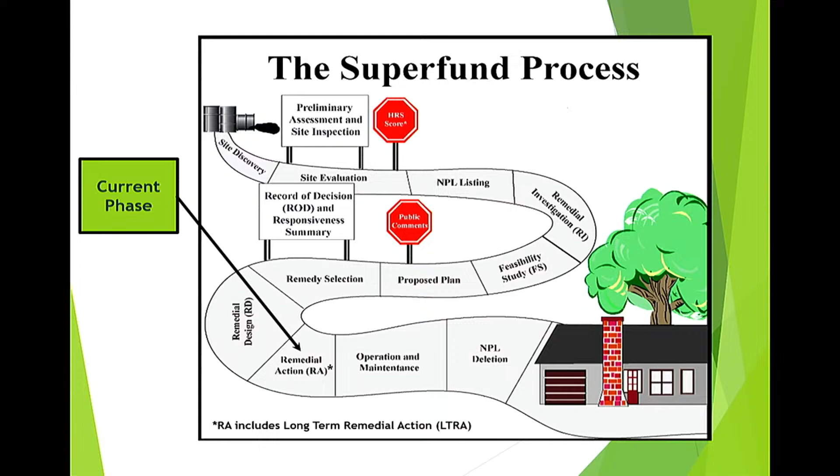So the site location, the Bandera Road Groundwater Plume Superfund site, is here in Leon Valley, in Bexar County.

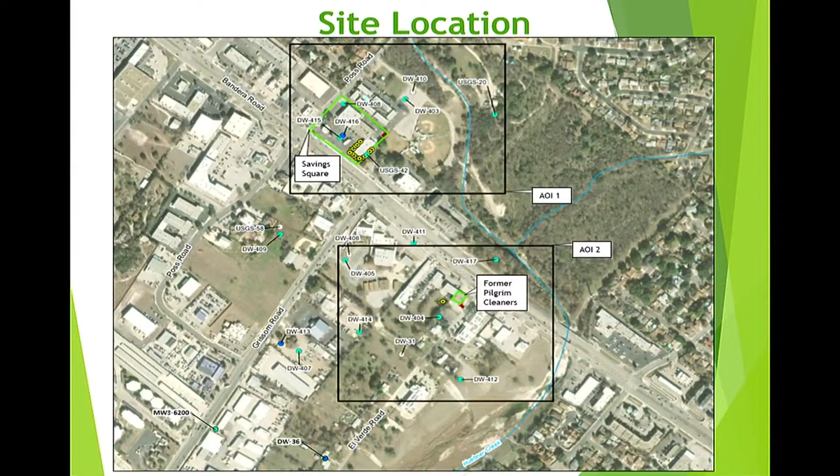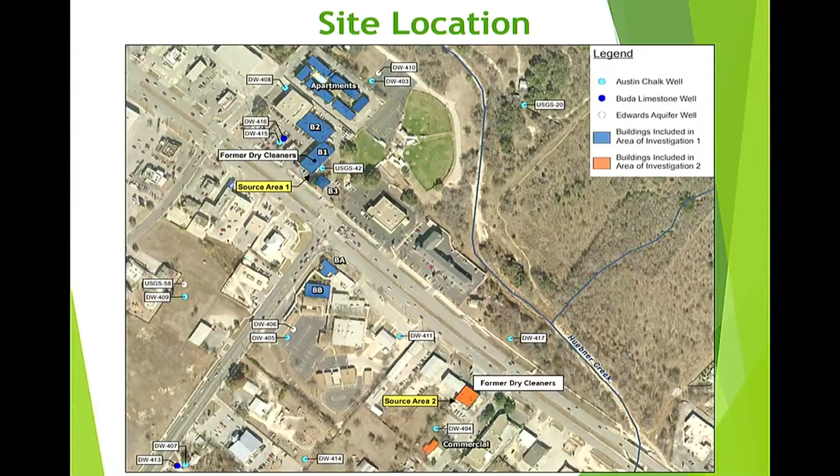The site has two source areas that were identified, AOI, which stands for Area of Investigation. We've got AOI 1 and AOI 2. During the remedial investigation, multiple AOIs were looked into, and these two were determined to be the source areas that needed to be treated. AOI 1 is what we call Savings Square, a shopping center off Bandera Road. AOI 2 is centered around the former dry cleaners, called Pilgrim Cleaners, just across the street from City Hall. Other well locations shown are groundwater monitoring wells that we sampled. This also shows more detail on different buildings that were investigated, some well locations, and the associated AOIs, AOI 1 and 2.

For site background, the site was first identified in 2004, part of the TCEQ voluntary cleanup program, later added to the National Priorities List by EPA in 2007. The CAG, or Community Advisory Group, was formed shortly after. That same year, immediate action was taken to connect some private residences to public water supply, to eliminate exposure to contaminated water. A health assessment was completed, and steps were taken including installing indoor air mitigation systems at one of the buildings at Savings Square, and plugging and abandoning private wells that had the potential to contaminate the underlying aquifer, the Edwards Aquifer.

In 2009, and then from 2011 to 2012, the remedial investigation and feasibility study, and a follow-on remedial investigation, were performed. As mentioned, the two source areas identified were both former dry cleaning facilities: AOI 1 at Savings Square, and AOI 2, the former Pilgrim Cleaners. The record of decision was finalized in 2013.

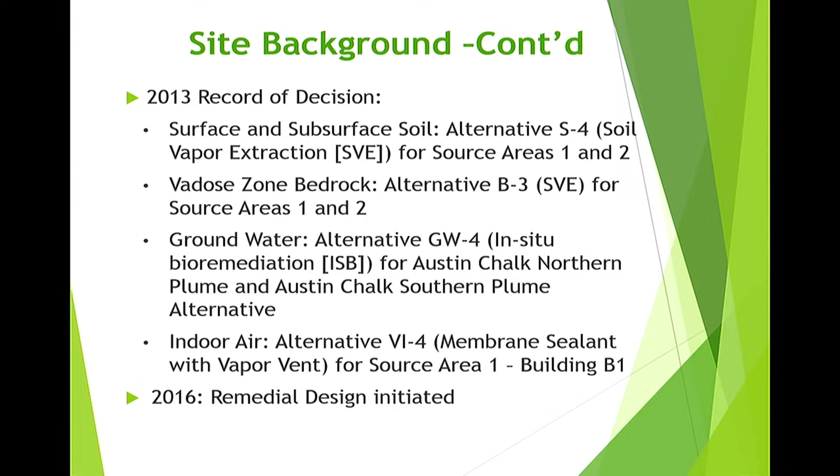That was the record of decision, and it rolled into the remedial design in 2016. As part of the design, more data was collected: 4 rounds of groundwater sampling, 5 rounds of indoor air sampling, and some soil gas sampling. They also abandoned 8 additional wells with the assistance of the Edwards Aquifer Authority, to continue reducing potential opportunities to contaminate groundwater further into the Edwards. In November 2020, the final design was completed.

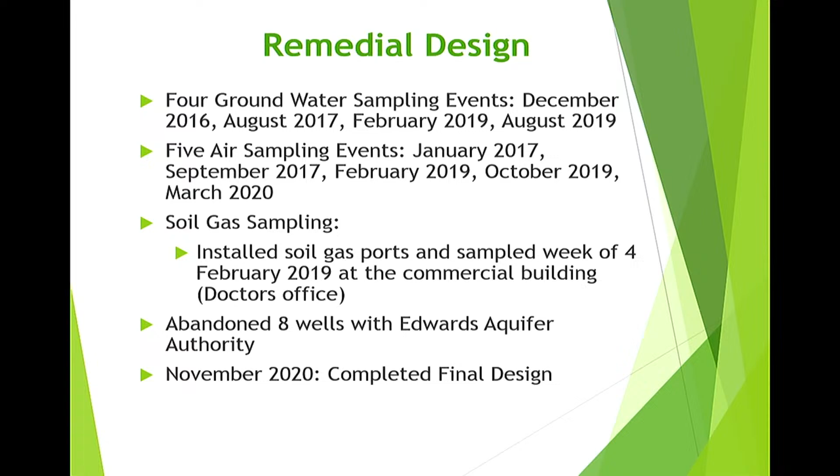So at this point, the remedial action, the remedy's been installed. For the soil vapor extraction system, both were installed and completed back in January 2024, and the systems began operating later that same month. One note: we've got 2 systems, one at AOI 1, one at AOI 2. The system at AOI 1, we've done some shutdown testing and determined that pulsed operation would be the best way to operate it, and that was started in October 2025. We'll get into that a little more later.

We're continuing to do O&M of the systems, coming out to check on them, address alarms, take readings, that kind of thing. We're also doing indoor air sampling, which we currently do on a semi-annual basis, typically February and September of each year. This shows our most recent events. We did collect samples back in February of this year, and we'll go over those results in a bit.

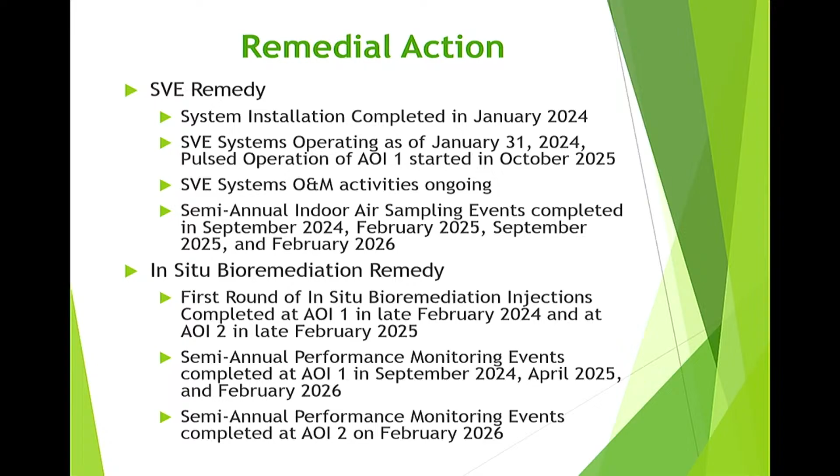For the groundwater remedy, we've done one round of injections at both sites. At AOI 1, those injections were done back in February of 2024, and at AOI 2, they were performed in February of the next year. Now, in the period after the injections, we're collecting groundwater samples from the immediate area where we injected the amendment to evaluate how the remedy is performing. We're doing those monitoring events on a semi-annual basis. At AOI 1, we've had three rounds of sampling, and at AOI 2, we just did our first round of sampling in February of this year. I'll let Taylor go over our more recent groundwater sampling results.

Do you have that clicker? Oh yeah, here you go. Just click that. All right.

This table here, I should probably differentiate. As Greg mentioned, we have our annual groundwater sampling, which is a site-wide effort, and then our ISB sampling, which is a targeted effort specifically for measuring our ISB performance. This table is for our annual groundwater sampling. The different wells we sample are in the column on the left. The far right column is our most recent sampling event. This was at a unique point in February where both the annual groundwater and the ISB performance monitoring sampling were all collected during one collective big event.

The results that are highlighted are those that exceed the EPA MCL for PCE, which is 5 micrograms per liter. If you look at DW404, the second one on that list, you'll notice that we have an exceedance for the first time since December 2016.

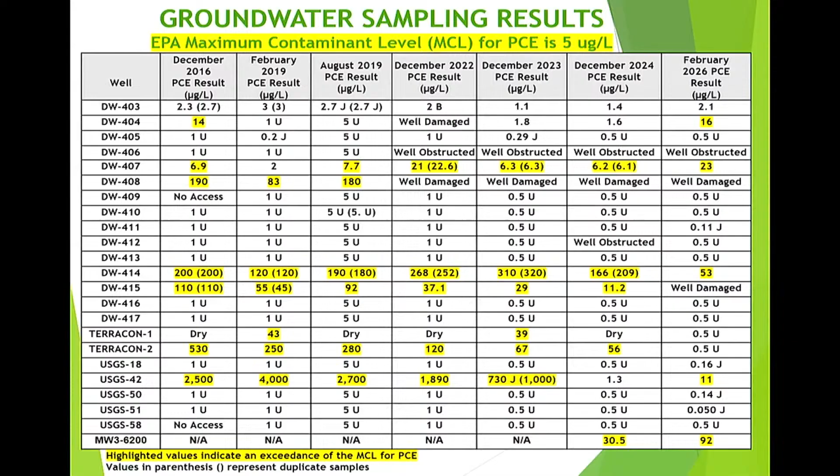Same with some of those other wells—415 now is in the same category. Parking lot damage, or what's going on with that? I could look at exactly what our notes said, but I think it's just some of the wells—we've had a rock that's kind of obstructed it, or a metal clip from our sampling tethers. And then there was one well, I think, where it had a bunch of old tether and diffusion bags stuck in there. So I think it's things that can be addressed so that we should be able to resume sampling. Those wells are still usable.

Yeah, I believe so. What's the history with that MW3 6200? That's an old well.

Early in the presentation when Greg was talking about AOI1 and AOI2, before the ROD, they were evaluating multiple different areas as multiple different AOIs. At one time, I believe there was upwards to 5, and eventually they were all ruled out to where AOI1 and AOI2 are considered to be the source areas that were targeted as part of our work.

We believe that MW3 6200 was part of the AOI3 investigation, so it's kind of in our area, and it was readily available for us to bring in rather than drilling a new well. Is that the old storage unit? Yeah, and it's an Austin well, right? Yeah, Austin Chalk.

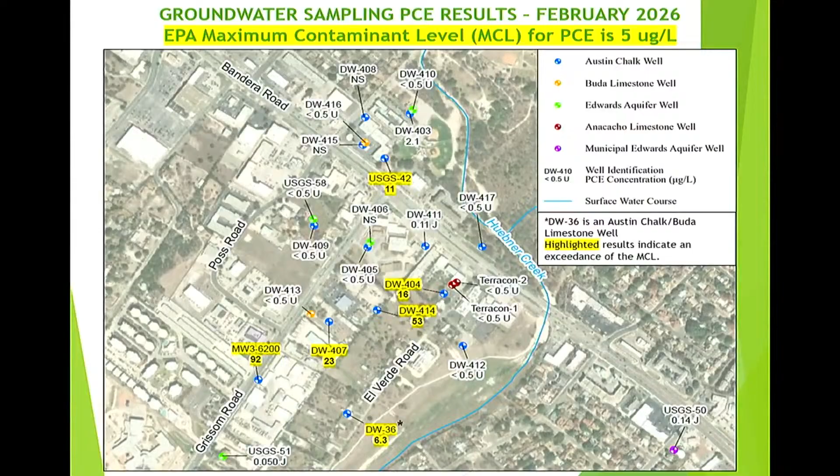Especially when you get to the Cis12 DCE and the vinyl chloride, that's what you would expect from the reductive dechlorination process, seeing those start to rise while PCE and TCE lower or reduce. And then at AOI2, we have Terracon 1 and 2 with VC exceedances and at 404.

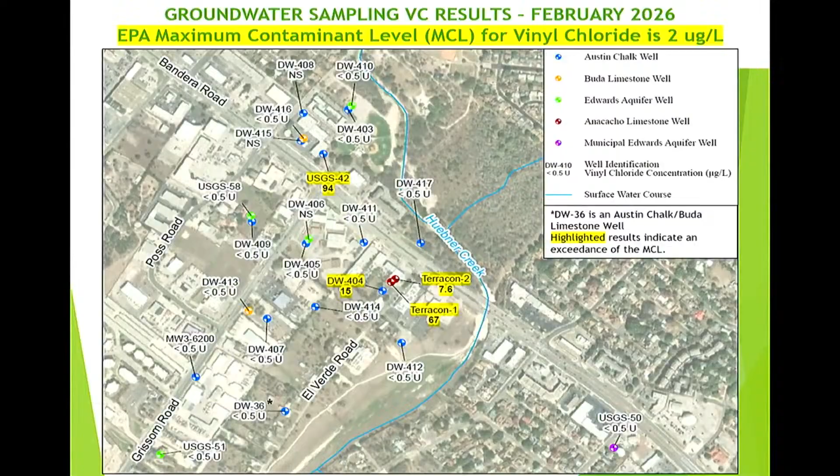Okay, so this shifts gears from our annual groundwater sampling, site-wide sampling, to our targeted ISB, our in situ bioremediation performance sampling. So this is a map of our AOI1. Those dots that you see going around the perimeter, like in a U shape, around that building there.

The red, both the red dots and the yellow dots, they're all injection wells. Whether they're used for injection or for sampling, that's when they'll be red versus yellow. So the red dots are injection wells that we use for directly injecting our amendment into, and the yellow wells are used for actually sampling to gauge the performance for those.

So USGS 42, that's the historically hot well. That's closer to the source release, in the bottom right corner. As you can see, that's come down quite a bit from baseline. Each of the results that we have on here, the top is their baseline result, and then with each consecutive ISB sampling event - first event, second event, third event - that's the data that you see in those call-out boxes.

Going around clockwise, IW06, as you can see, that's a good indication also, just like USGS 42, of reductive dechlorination working, starting at 45 and then most recently being dry, but coming down the two previous events.

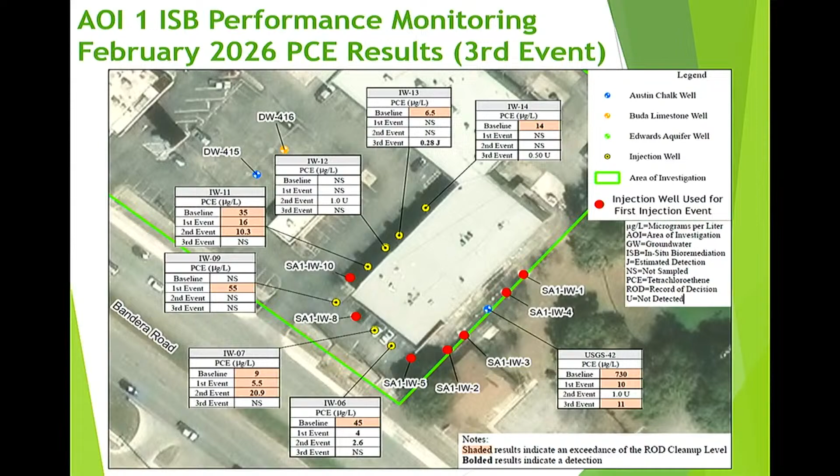Okay, so these are trend graphs for some select wells that we've looked at. Specifically USGS 42. You can see this would be something that you would expect for complete reductive dechlorination to be occurring, where PCE starts really high, PCE and the daughter products all come down, and then you start to see sort of a rebound of vinyl chloride and cis-1,2 DCE.

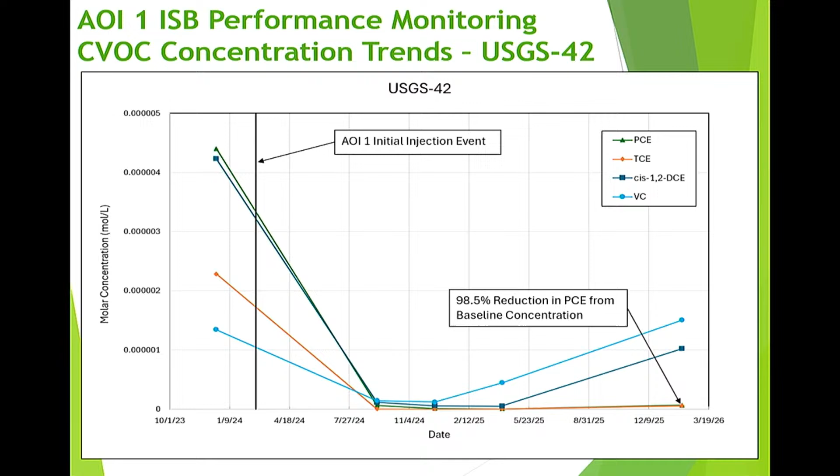IW11 was going down, both PCE and TCE being the highest. There's another general indication of reductive dechlorination doing okay, maybe with incomplete reductive dechlorination, with DCE and vinyl chloride trailing off.

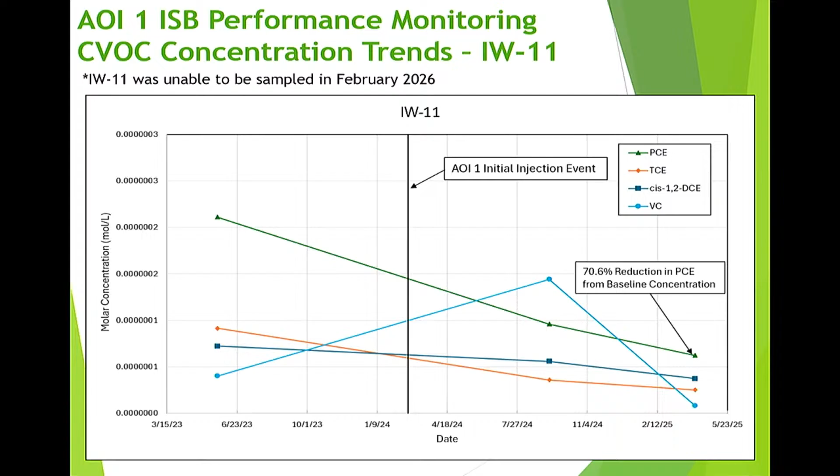Okay, so some of our general observations: we've had significant reduction in CVOCs from baseline, particularly at USGS 42 and IW6. Treatment areas that were established, that's likely due to those being areas where the available carbon in our amendment was able to be effectively distributed through the plume area.

The limited effectiveness that we see from our IW8 injection, that would be the well we inject right next to IW7, where we would hope to see favorable results. That would indicate there's limited effectiveness from what we're doing at IW8.

And as is typical for injection remedies, we've seen rebound following depletion of the organic carbon amendment. So the available carbon in our amendment, when we inject, can deplete over time, and it's no longer available for the biological process to keep going.

And as we said, several wells were unable to be sampled because they were dry, meaning they had insufficient water in them. That's another complication of having several wells in a small distributed area and showing the effects of a karst aquifer.

Our recommended next steps would be to collect another round of ISB performance sampling. John, like I was mentioning to you, then we'll probably determine from there whether we need to do another event or not.

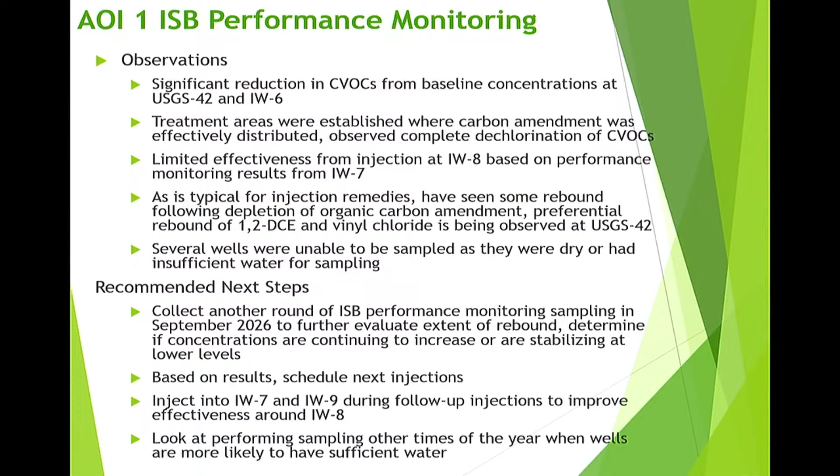All right, from the groundwater results, we can move into the indoor air sampling that we performed. So these are the indoor air sampling results, just for PCE.

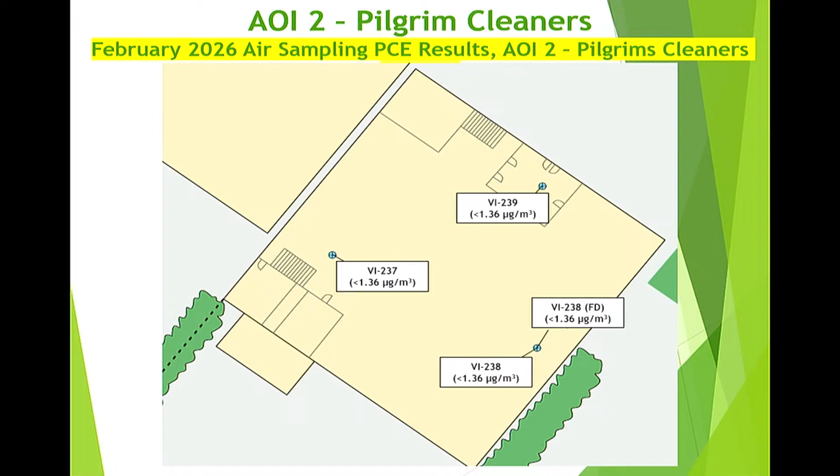Building 1 is at the Saving Square site, and building 3 is the vet clinic right next door. Mostly non-detect for PCE, but a couple low-level detections at Saving Square. We also sampled at the former Pilgrim Cleaners building, and had all non-detects for PCE there. There's a former doctor's office across the street, a little bit down El Verde from the former Pilgrim Cleaners building, but we sampled that one as well and had non-detects for PCE there.

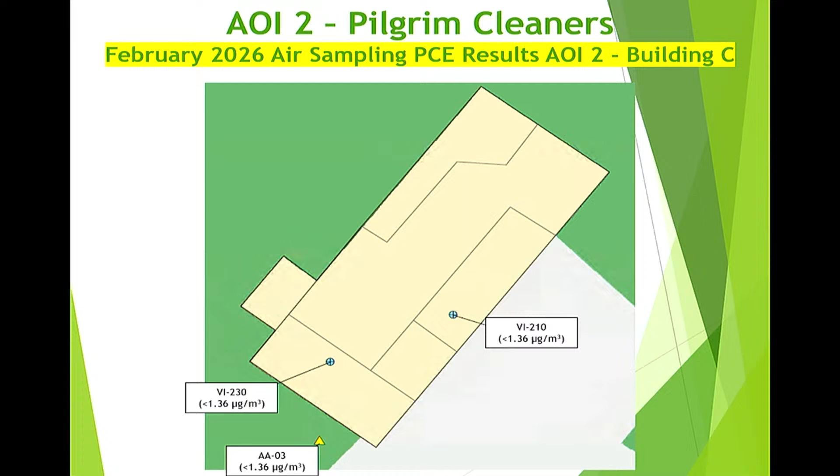While we had low-level or non-detects for PCE, we did have some hits for TCE at building 3. The most recent results show one sample location a little bit over the indoor air cleanup goal, which for TCE is 8.8. We had a detection of 11 there. The other two had detections, but below the cleanup goal. That's kind of consistent with the past event before that.

To address that TCE exceedance, there is an existing vapor intrusion mitigation system, basically a fan to help pull vapors from underneath the slab. But it's not currently in operation, so we want to get that back up and going, and hopefully make some progress on that.

That fan hasn't been operating for a while. It was two solar powered fans, and it looks like the solar panels are no longer working. So the fans need to be replaced, and what we propose to do is tie it into the electrical panel so the fans run continuously versus based on solar power availability.

When do you think that'll be finished or get that back going? I think there's some things that administratively have to get done so we can get out there and do that, but hopefully in the next couple months.

Greg, which of those buildings are occupied currently? Savings Square is occupied, building 3 is, and the former Pilgrim Cleaners is now the Royal Tile building. But as far as I know, and maybe David or someone at the city would know, the former doctor's office over there, I don't think that building is occupied.

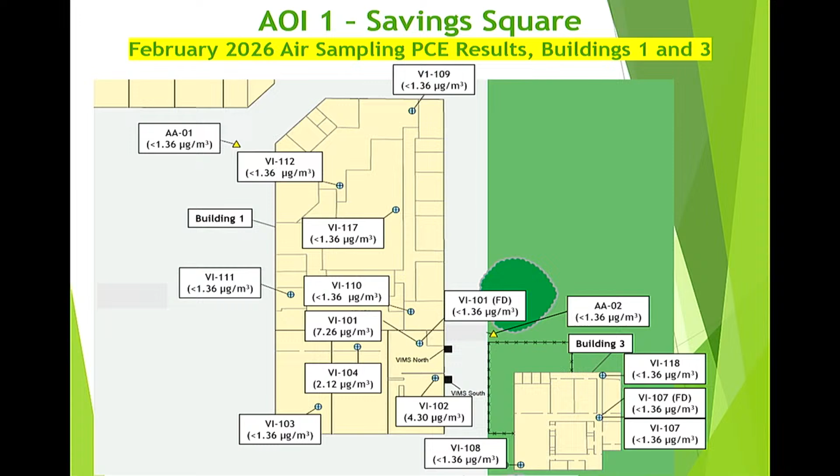Are those Summa canisters? How do you all do that? Yeah, we collect Summa canisters, and since it's like an industrial or commercial exposure, we try to collect those samples over an 8-hour period -- they kind of reflect the workday.

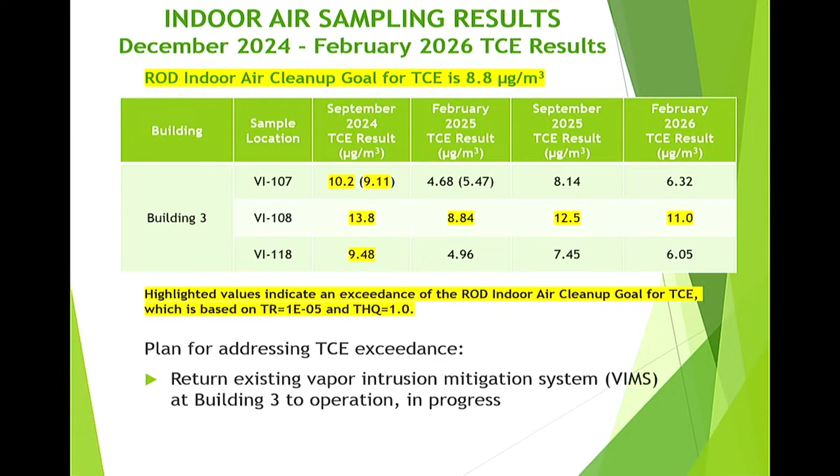Now we can get into the two SVE systems. This is the system over at AOI 1, showing the system layout. Both systems are built inside shipping containers or Connex boxes. At the AOI 1 site, that system's located in the rear parking lot. Exterior to the container, we've got some other equipment.

We've got a condensate storage tank, the GAC vessels, which are used to treat the discharged air before it's emitted to the atmosphere, and some other electrical components. It also shows the subsurface piping that goes from the system out to the individual SVE wells.

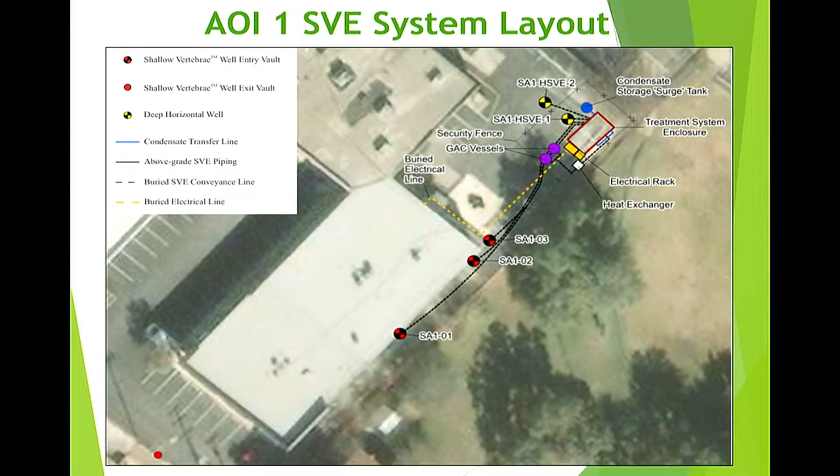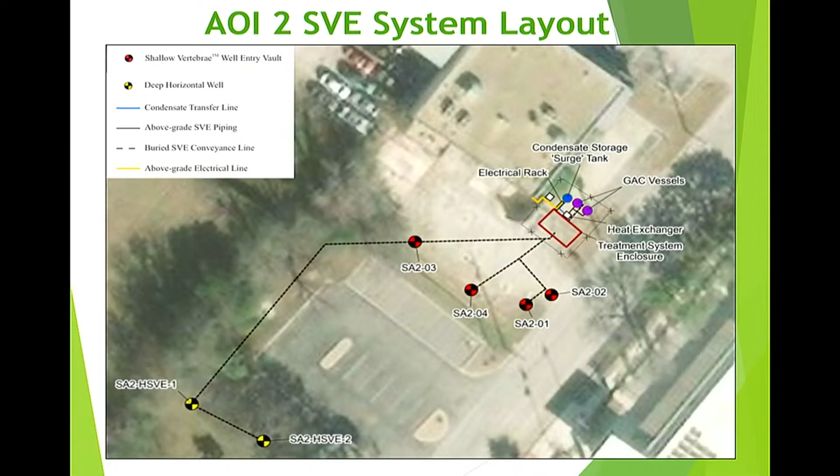Same thing here at AOI 2 -- we've got the system across the street in a fenced-in area. It's the same layout as AOI 1 as far as the equipment involved, just a little bit smaller system. You can see all these wells here: the red dots are the shallow SVE wells, and the two yellow dots are actually located on the property where that former doctor's office is -- those are the deeper horizontal wells.

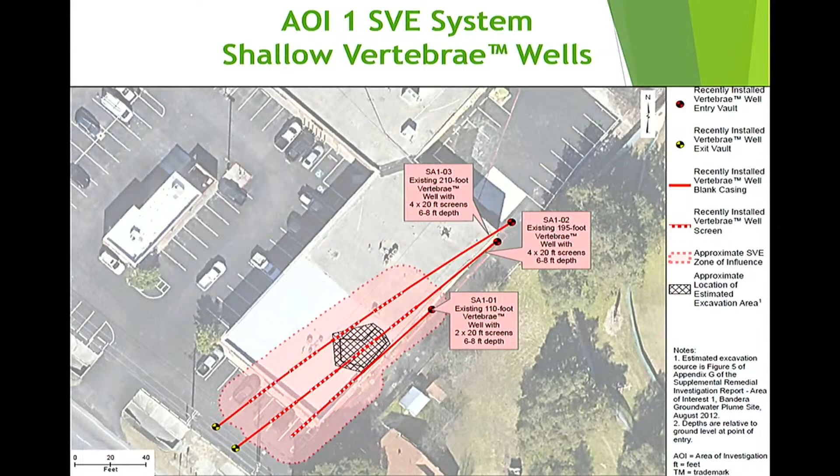At AOI 1, these are the shallow wells, typically 6 to 8 feet below the ground. Where you see the dashed portions of the lines, that's where the screen segments are, so that's where the system is pulling air from. We've got 3 wells there, each having 2 to 4 screen segments.

At the AOI 2 site, similar layout, 6 to 8 feet below ground. We've got 4 different wells with a bunch of individual screen segments there, all kind of pulling air from underneath the building.

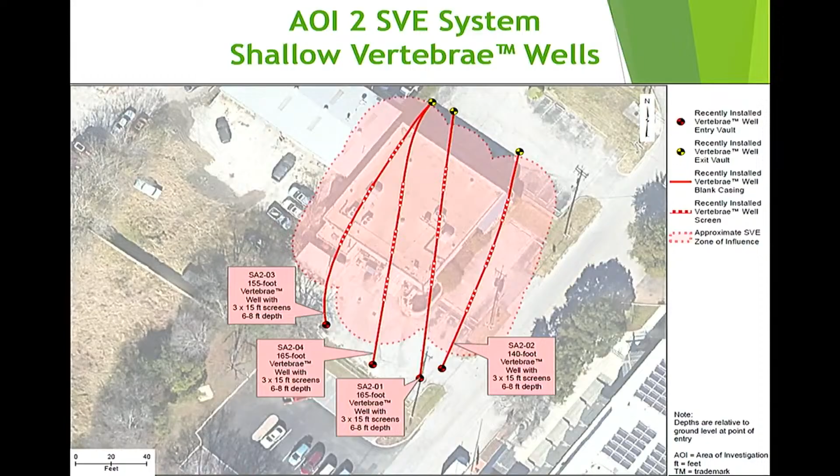The 2 deep wells, so on each side, AOI 1 has 2 of the deeper wells. Those are screened further down, from 32 to 34 feet, so kind of in that bedrock vadose zone. And then they've just got solid sections of screen there, 120-foot screens.

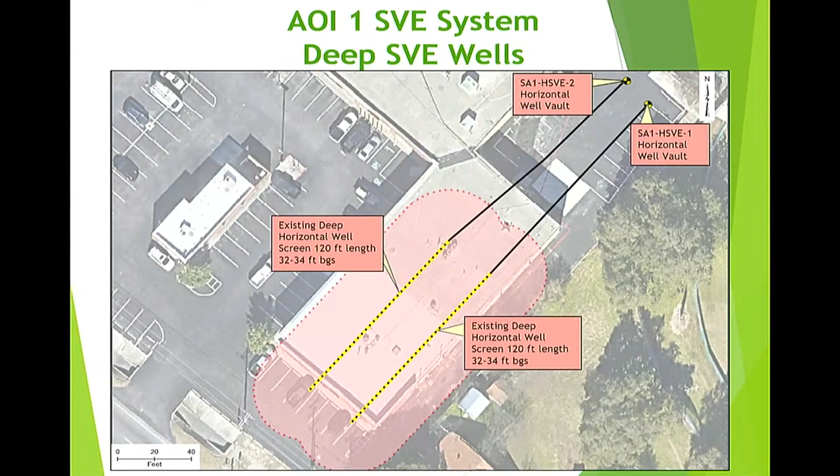And then pretty much the same over at AOI 2 as well, same depth, 32 to 34 feet, screened underneath the building.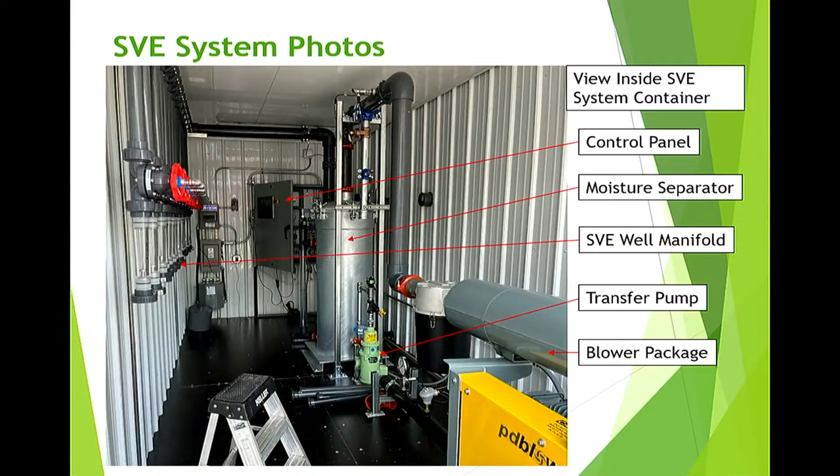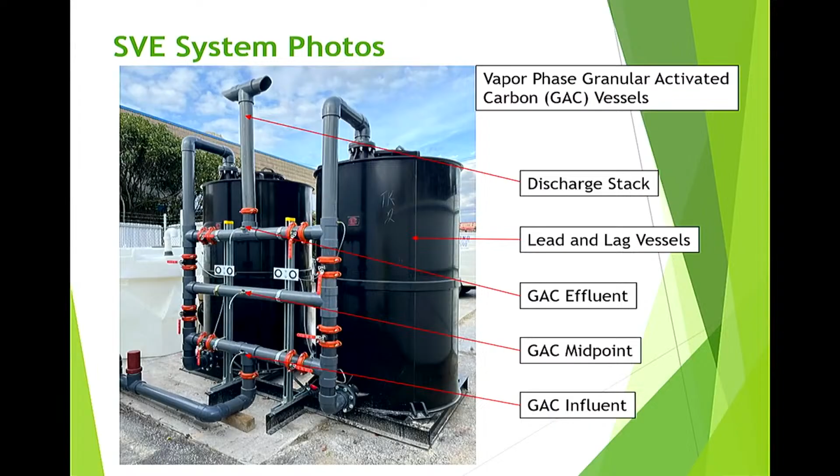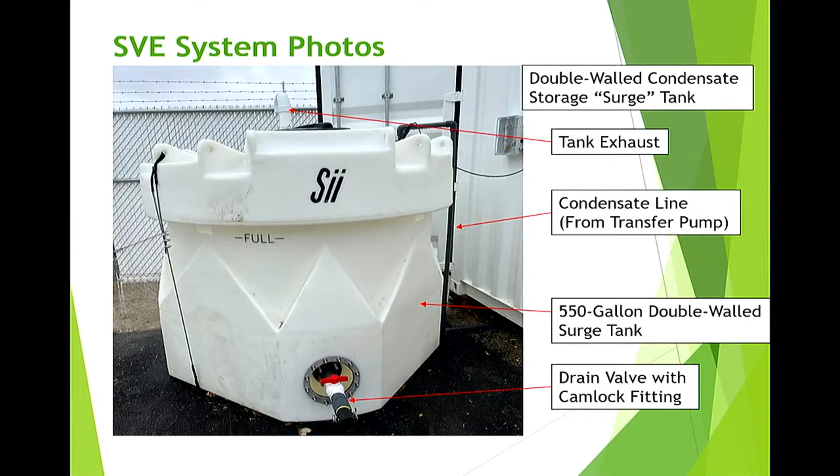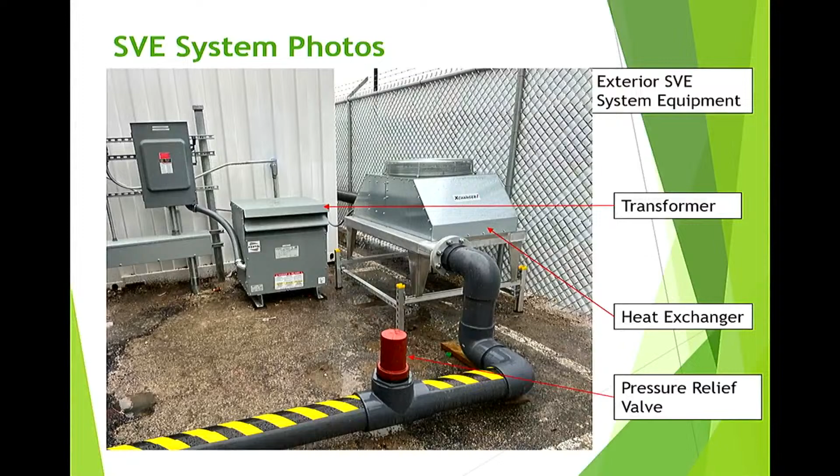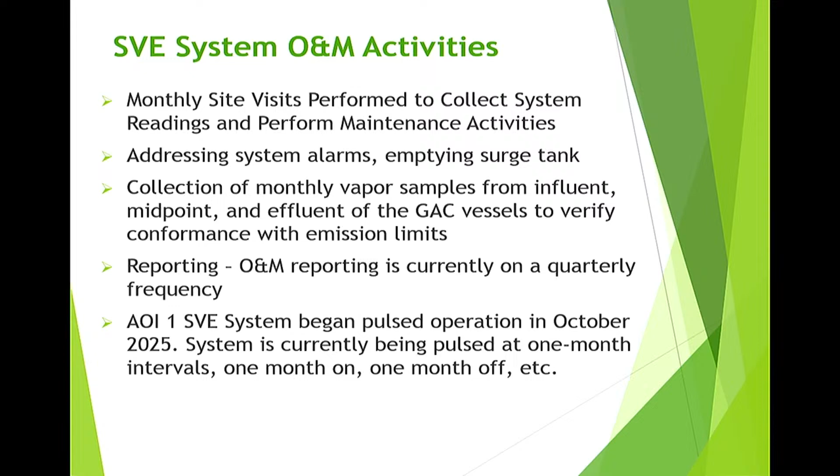For the AOI-1 system, we began pulsed operation back in October 2025. Earlier that year, we did a shutdown test where we shut the system off for a week, then restarted and sampled it to see how much concentrations had rebounded. We found that AOI-1 had reached a steady, lower state concentration, but once the system was off, concentrations were much higher when turned back on, then quickly dissipated back to low levels. So it seemed more efficient to cycle the system, still sweeping the same pore spaces and getting mass removal, but saving energy by not running continuously. We now operate it on a 1 month on, 1 month off basis.

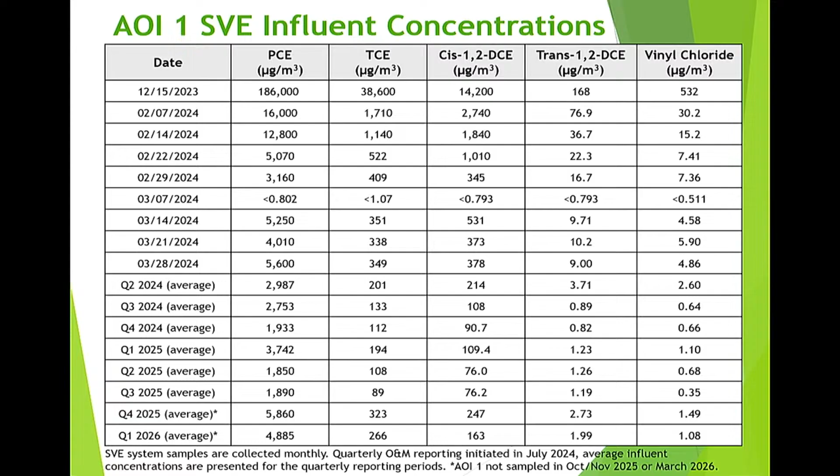This shows the influent concentrations at the AOI-1 system. We had pretty high concentrations when we started it up initially in December 2023 - you can see the PCE result of 186,000. As we've operated over the last 2 years or so, things have declined, and now we're more in the 4,000 to 5,000 range. PCE is really our primary contaminant. We do have detections of some breakdown products, but the concentrations are quite a bit lower.

This is a graphical summary of the PCE concentrations in the influent. You can see the sharp decline when we first started the system, and then it leveled off for a while. The first shutdown test we did was just a week long - we saw the concentration jump up and then quickly dissipate back down to normal levels. Based on that, we recommended starting pulsed operation, which began in October of 2025. We left the system off for a month, and actually a little longer as we were doing some other sampling at the time. When it was restarted in December, the concentration came up to around 12,000, but within 24 hours it had dropped back down to below 6,000.

So when we turn the system back on each time, we collect samples 1 hour after we start it, and then 24 hours after, just to see how much concentrations have built up or rebounded since it's been off, and then how quickly they're dissipating once the system's running.

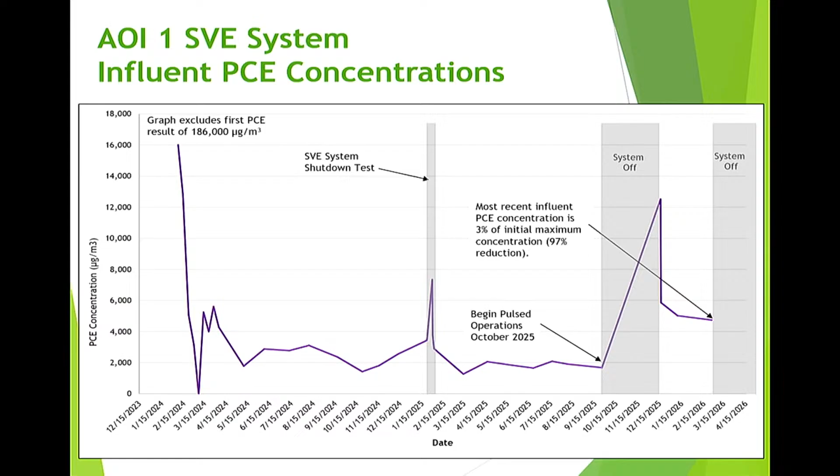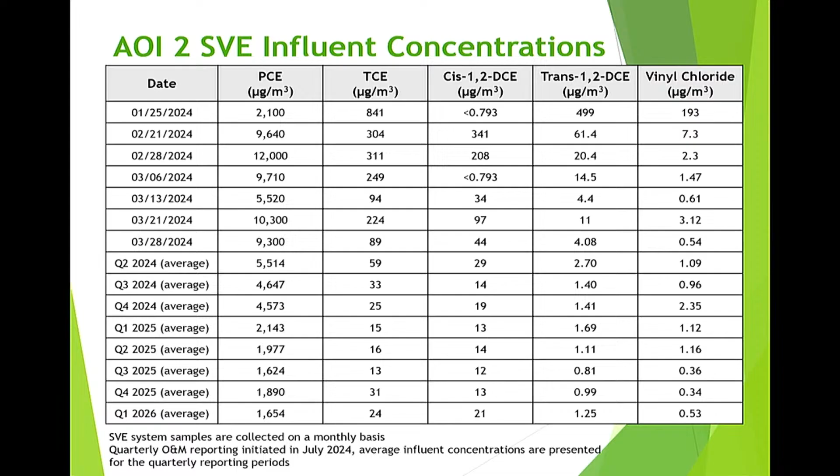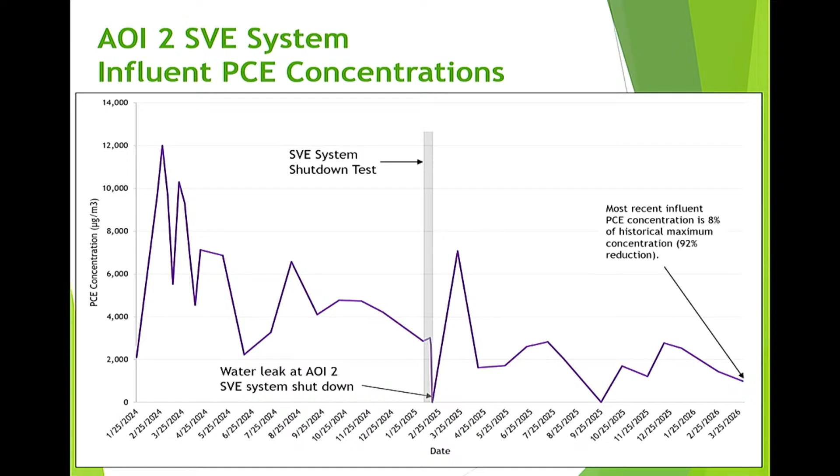Here's the PCE concentrations - you can see a little up and down initially, but generally declining. We also did a shutdown test here, shutting the system off, and when we restarted it a week later, we really didn't see any significant buildup or rebound of concentrations. So for this one, it didn't seem to make sense to start pulsed operations, at least not at this point. We also had a water line leak at the building, which caused our system to be shut down for a bit, and I think we got a non-detect in one of our influent results due to that, but as you see, it had just stabilized at a lower concentration. So we'll look into opportunities to optimize operations or look toward shutting it down eventually.

For the PCE mass removal for this system, it's less than AOI-1. We've removed about 49 pounds of VOCs, and of that, about 47 pounds has been PCE. You can see the blue line is the mass removal rate in pounds per day for PCE - it's a little up and down, but generally declining.

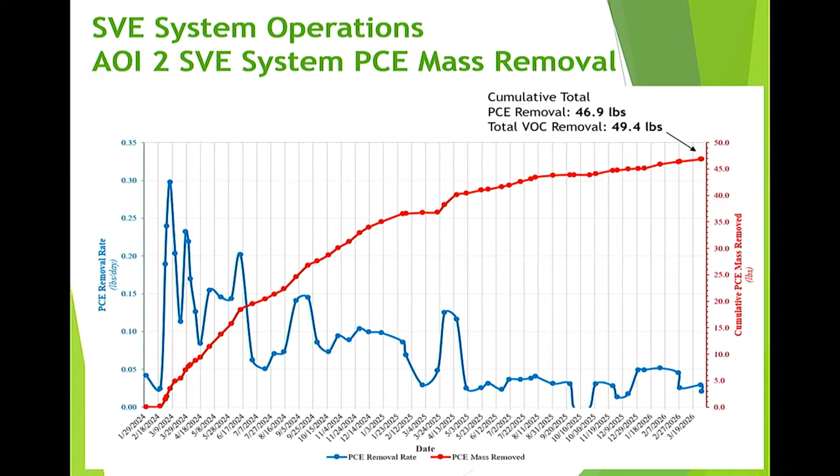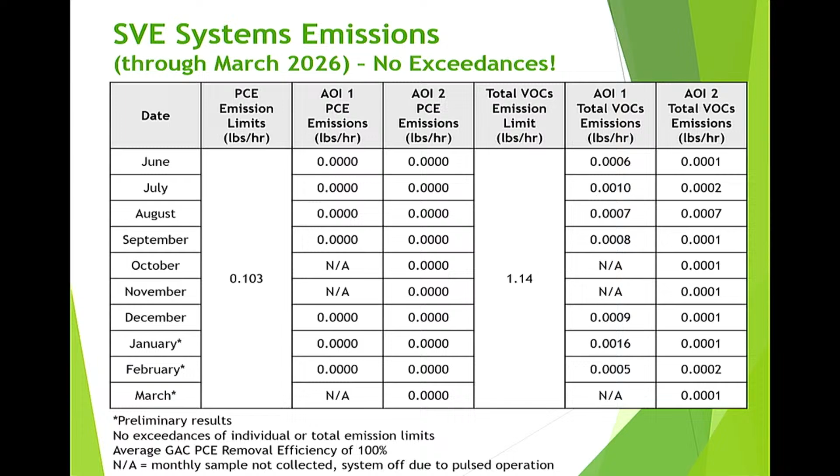For our system emissions, we haven't had any exceedances of the emission limits. You can see that our emission values are quite a bit lower than the limits we have, so that's good news. But we check it on a compound-specific basis, so we've got a limit for PCE and then a limit for the total VOCs.

Both systems have been well below the limits. With that, I think Allie with Skeo was going to provide an overview of the institutional controls.

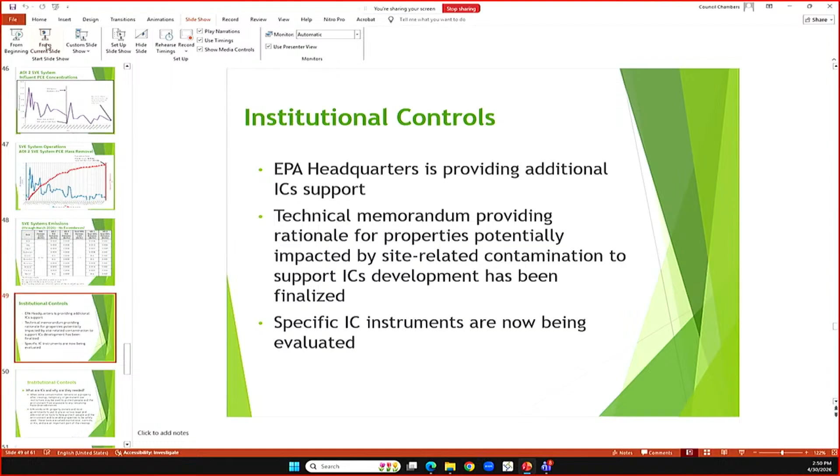Awesome, thank you. One thing is I can't see the slide deck. Is it possible for me to see that? Oh, there it is, perfect. Okay, can everyone hear me pretty well? How's my volume? Great, okay, awesome.

So my name is Allie. I'm with Skeo. We are an EPA headquarters contract working under the Superfund redevelopment program, and we were brought in to provide some additional support with institutional controls.

As part of that support, we have been working in the background with the site teams on a technical memo, basically looking at the site decision document, what institutional controls were required, what properties were potentially to be impacted by site-related contamination, and ultimately the development of this IC tech memo. That's been finalized, and now we're in the phase where we're looking at specific institutional control instruments and evaluating their applicability to the site.

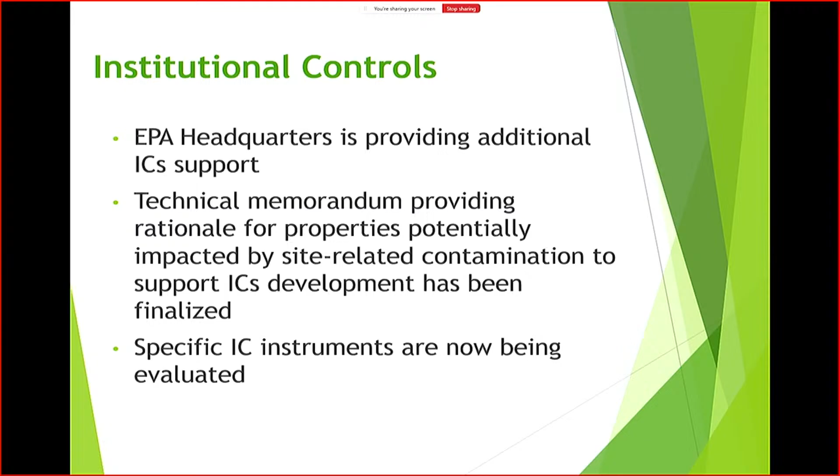The next slide, please. Oh, sorry. You got it. There we go.

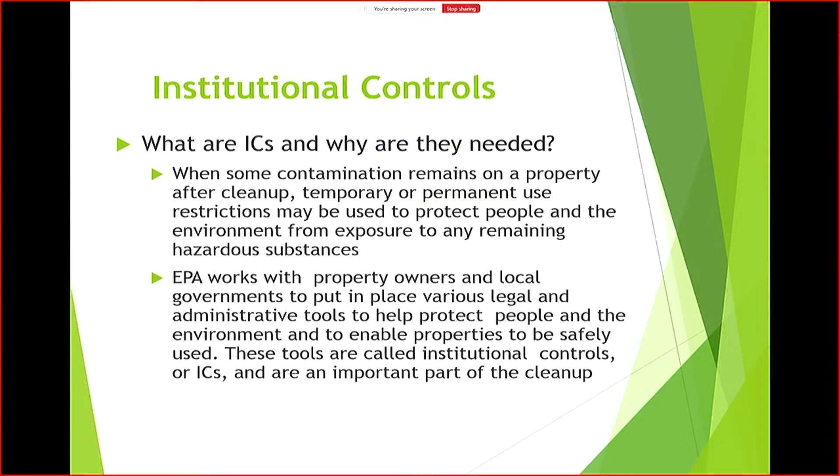So institutional controls, also referred to as ICs. What are ICs and why are they needed at Superfund sites? Institutional controls are used at Superfund sites when some contamination remains on a property after cleanup. They can be temporary or permanent restrictions, used to protect people and the environment from exposure to any remaining contamination, either on the surface or beneath the surface of a site. EPA works with property owners and local governments to put these instruments in place—various legal and administrative tools—to help protect people and the environment and also to enable properties to be used safely. These tools are called institutional controls, and they are a very important part of the cleanup process at Superfund sites.

Generally speaking, there are four categories of institutional controls, and institutional control implementation and planning is guided by a 2012 EPA institutional control guidance. These four types are proprietary controls, governmental controls, informational institutional controls, and a fourth category of enforcement or permit tools. We're not really going to talk about that in this presentation because it's not being considered at the site. Generally, what we find at Superfund sites is a combination of these categories are put in place.

Let's talk about proprietary and governmental controls—these are the main institutional controls being considered and that were required by the decision document at the site. Proprietary controls in Texas include restrictive covenants or deed restrictions that property owners or the state will place in the chain of title in the county land records for individual parcels or properties. These types of controls are often used for source properties, where contamination originated and is generally present at the highest concentrations.

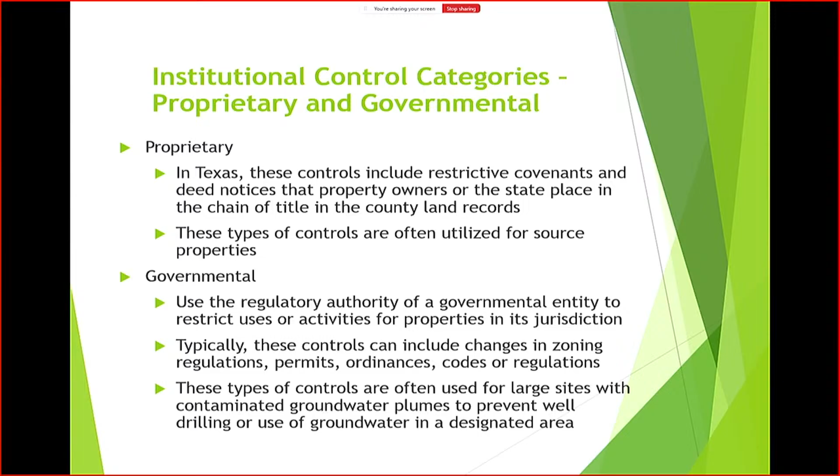The next type of IC category is governmental. Governmental control uses the regulatory authority of a governmental entity, like a city or county, to restrict certain uses or activities for properties within its jurisdiction. These can include zoning regulations, development permits, city or county ordinances, or different codes and regulations like building codes. These types of controls are often used for larger Superfund sites and can be really effective for sites with larger contaminated groundwater plumes, basically preventing any exposure to contaminated groundwater through activities such as drilling a well or using that groundwater for domestic purposes.

The informational institutional control category can be used, usually in combination with the other two, as a way to provide information to users about the potential for exposure to contaminated material. These can be recorded notices on a property record, advisories to a local community, health department, recreational users, or any person using a property where contamination may be present. They don't restrict any activities, but they do provide information to somebody who may need to use the property. Examples might be a deed notice, a fishing advisory, informational letters, or potentially using a 1-call or an 811 digging system.

So for Bandera Road, the 2013 Record of Decision did select institutional controls as part of the remedy. If you've read the ROD, you've noticed it's mentioned several times. In general, the ROD specifies that ICs in the form of administrative and/or legal instruments will place restrictions on the use or development of land and/or groundwater within a defined area.

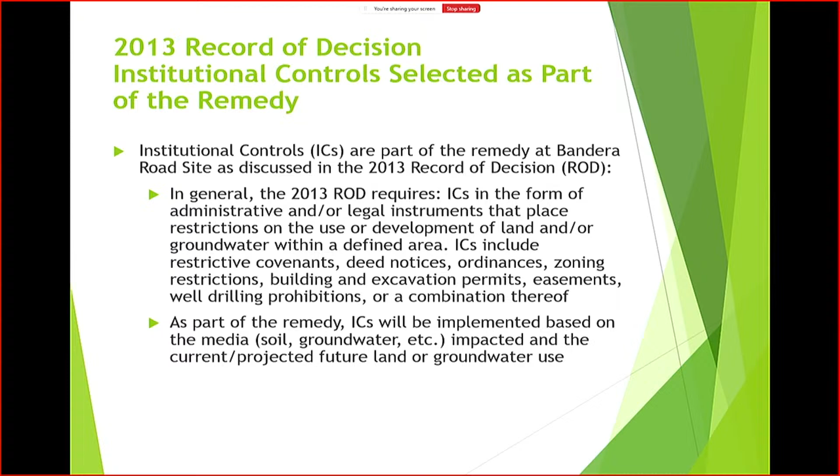So the Texas proprietary controls are restrictive covenants, as well as the potential for a deed notice to protect against exposure to contaminated soil, subsurface soil, groundwater, and indoor air, and to protect those remedy components. The restrictive covenant would get tied to a deed, and it would have activities that are restricted on that property—if there's an issue with digging for subsurface soil, or if certain land uses like residential use are not appropriate, that would go in that restrictive covenant tied to the deed.

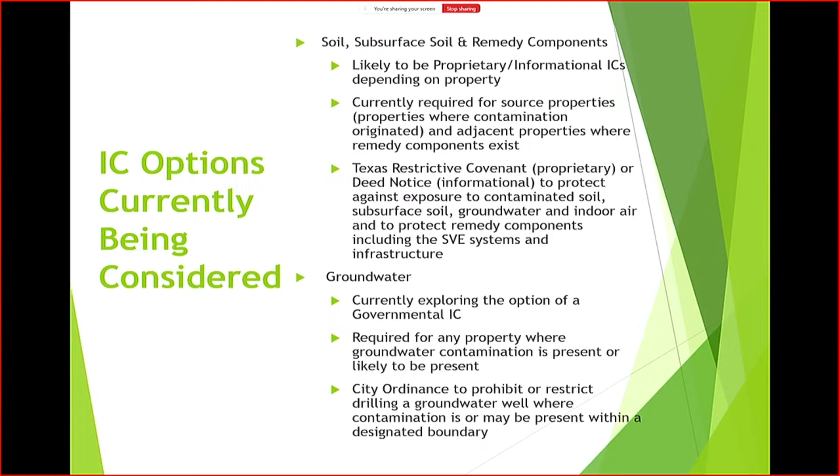For groundwater, we're currently exploring the option of a governmental IC—this would be an IC through the city of Leon Valley. It would be required for any property where groundwater contamination is present beneath the property or likely to be present based on groundwater flow conditions and where known contamination is. A city ordinance is being worked on to prohibit or restrict drilling a groundwater well where this contamination is or may be present.

So we are, in conjunction with EPA and TCEQ and the city of Leon Valley, under discussions about the feasibility of amending that ordinance to be protective from contamination from the site. That might involve changing some of the wording around what is permitted within a certain area that would encompass the groundwater contamination at the site.

So potential next steps we are currently exploring, mostly continued coordination. TCEQ and EPA have really been hitting the phones pretty hard, talking to stakeholders about the options here—continuing coordination with the interagency work group, coordination between EPA and TCEQ, coordination with the city on amending the ordinance, and discussing with source property owners about voluntarily recording restrictive covenants, as we discussed earlier, to protect against exposure to contamination that remains at depth on these properties.

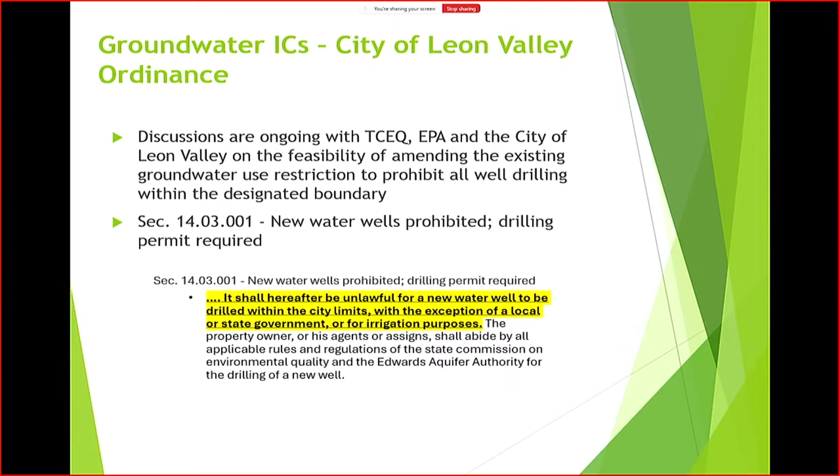Anyone else have questions about what we covered? I don't see any other questions. Thank you. All right.

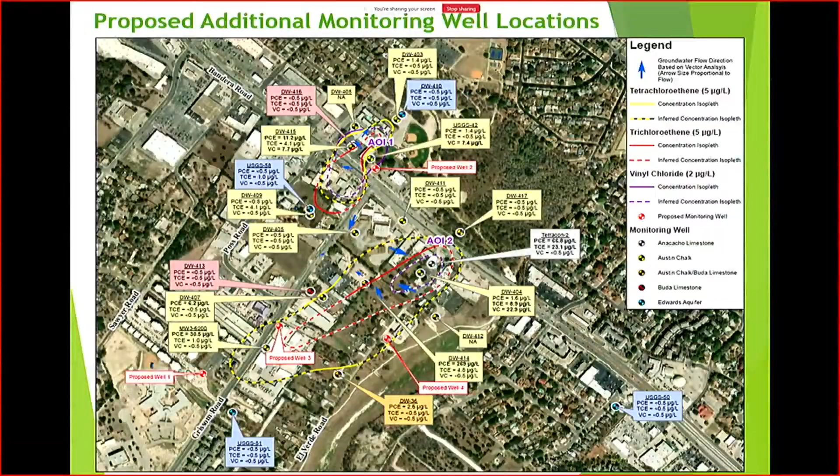All right, I guess just going over the monitoring activities we currently perform. We do groundwater monitoring, with an annual event where we collect samples from the site-wide network. Our last event was February of 2026, so tentatively we'll look at doing another round of sampling in February of next year.

For soil vapor and indoor air monitoring, we do monthly sampling of the soil vapor extraction systems to monitor effectiveness and performance of those systems. For indoor air, we do that on a semi-annual basis, and our next event there is scheduled for September of this year.

Then for the groundwater remedy, the ISB performance monitoring is a more focused sampling event in the areas immediately adjacent to where we've injected, just to monitor performance of those injections and inform additional steps that might be needed.

We have the next event tentatively planned for September 2026 for AOI 1 and 2, but we had some discussions earlier today. We may change that schedule to try to target times of the year when we're more likely to have more water in the wells and have higher success of getting samples. So that'll be something that could happen.

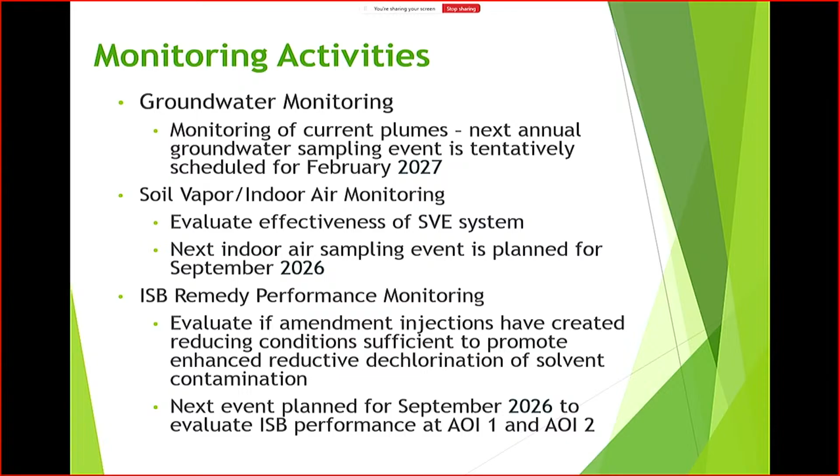This is just a recap of the upcoming activities. We're going to continue O&M of the two SVE systems. Summer of this year is tentatively when EA is looking to install those new monitoring wells, and shortly after that we'll collect baseline samples from those wells. Then in September is our next semi-annual indoor air sampling event, and also more ISB performance monitoring, though that may shift later, maybe towards November.

And then, I guess John wanted to see if there's any other community advisory group updates, or open it up for discussion.

Does anyone have any other questions or comments? The audience?

As far as a next community advisory group meeting, I guess probably early December, like we've done before, would be timely. We'll have more monitoring results to look at. So, and I don't have any other questions on your presentation.

Anyone else? Is there any way to estimate a percentage of how much has been removed of these contaminants? Just in the groundwater and vadose zone, or between the two remedies, you mean, or just one or the other? Both or whatever, yeah. Well, you could take, oh sorry, go ahead. Oh no, yeah, go ahead.